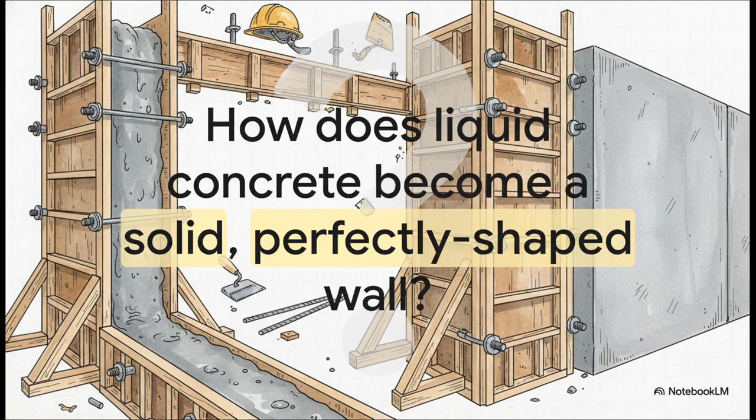So, have you ever just stopped and looked at a perfectly smooth concrete wall and thought, how? How does a wet, soupy, heavy liquid get held in place so perfectly before it turns to solid rock? Well, that's the exact mystery we're solving today. The answer is something called formwork, and really, it's just a temporary mold. The source material gives us this brilliant, simple way to think about it.

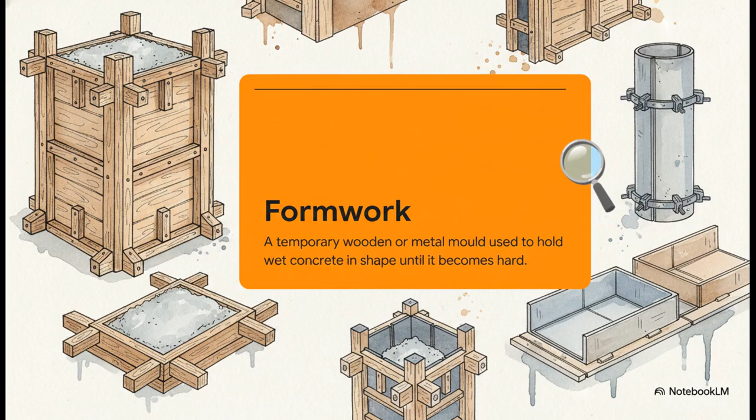Just picture a container or a box. That box is what gives the concrete its final shape, holding it all together until it's strong enough to stand up all on its own. Simple, right? But so important. Okay, so now that we know what it is, let's dig into why it matters so much. This is really the secret sauce, the hidden framework, pun absolutely intended, behind every single strong concrete structure you've ever seen.

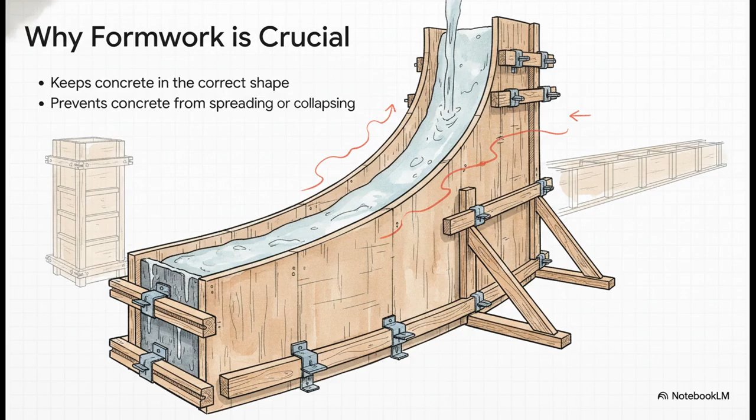You know, the job of formwork sounds simple, but it is absolutely vital. Its main role, of course, is to give the concrete its shape. Without it, you just have a giant gray puddle. But it also has to be crazy strong to hold back all that weight and pressure, keeping it from just bulging out or collapsing. This is the skeleton for everything from a simple garden wall to massive structural beams in a skyscraper. And this is why you have to get it right.

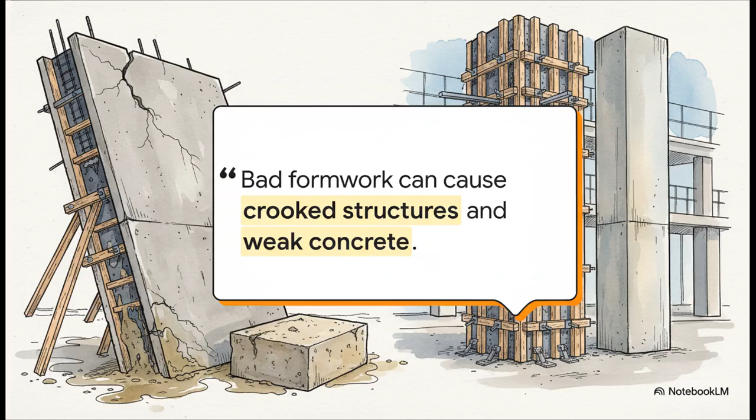The stakes are incredibly high. You see this quote here? Bad formwork doesn't just look sloppy. It actually creates structural weaknesses. A crooked wall isn't just ugly. It's a potential point of failure. So the big takeaway is this. The quality of the formwork directly, and I mean directly, determines the quality and safety of the final building.

All right, so you're convinced. You know this has to be done right. So what do you actually need to get started? Let's gear up and take a look at the toolkit for a successful build. First up, materials. It's a pretty straightforward list, really. You need your timber, your wood boards to build the mold. You need nails and screws to hold it all together. And then there's oil. Now that might seem like a small detail, but trust me, we'll come back to why that little can of oil is a total game changer.

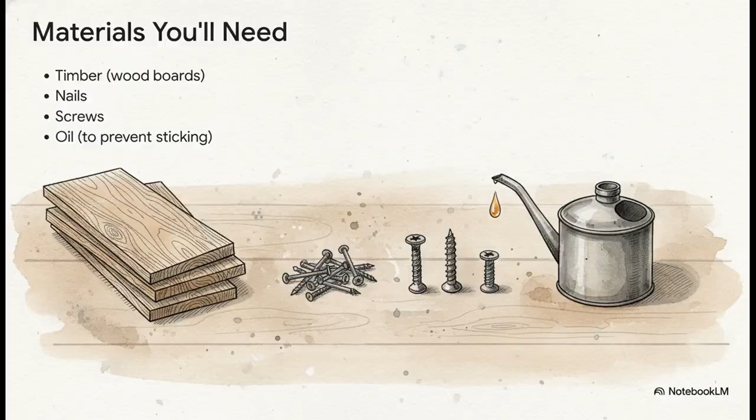Okay, we've got our materials, we've got our tools. Now it is time for the main event, actually building this thing. Let's walk through this step by step so you can make sure you get a perfect, strong, and safe pour every single time. But wait, before we even think about hammering a nail, we've got to talk about the golden rules. Think of this as your pre-flight check.

Use strong wood, no shortcuts with weak stuff. Make sure it's firm and stable, because it's about to fight a battle against the pressure of that concrete. Check that all your joints are tight, no gaps. You don't want concrete bleeding out. And finally, apply that oil.

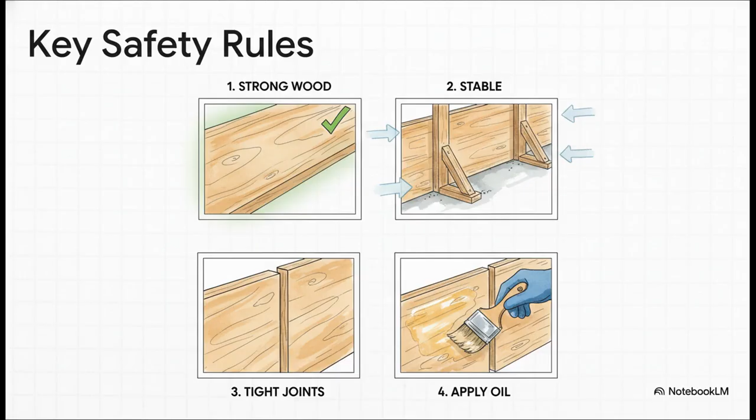This is what keeps the concrete from sticking to the wood, so it comes off clean. And here's the roadmap. It lays out the whole process perfectly. You measure, cut, assemble, and fix it together. But I want you to pay extra attention to steps 5 and 6.

Step 5, checking the alignment, is non-negotiable. That's what stops you from building a crooked wall. And step 6, adding braces for support, is what gives your formwork the muscle it needs to hold back all that concrete. Get those right, oil it up, and you are ready for the pour.

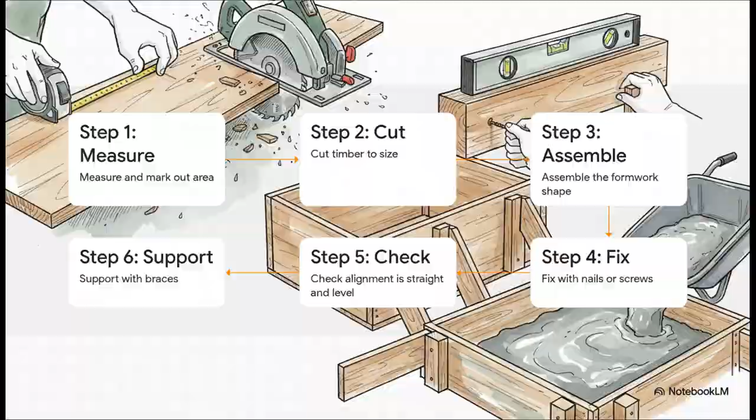So the concrete is poured, it's starting to harden. You'd think the job's over, right? Not quite. Taking the formwork down, dismantling it, is just as critical as building it. This is the big reveal, and you definitely want to do it right. Okay, let's look at the takedown.

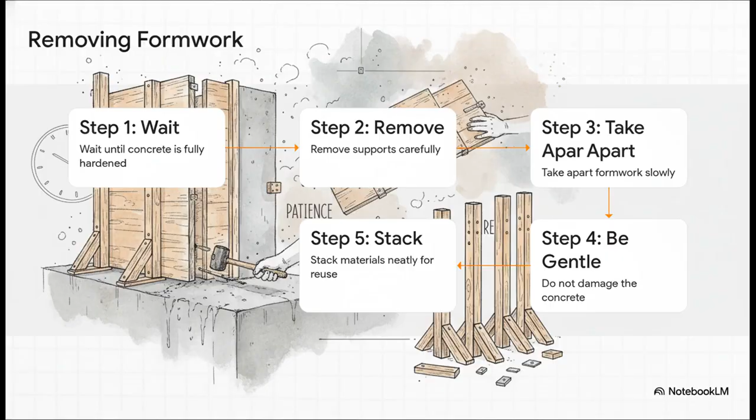I told you we'd come back to this. Seriously, if you remember only one thing from this whole explainer, let it be this. Do not rush this step. Taking the formwork off too early is one of the most common and most catastrophic mistakes you can make. That concrete needs time to get to its full strength. Just be patient. It's worth it.

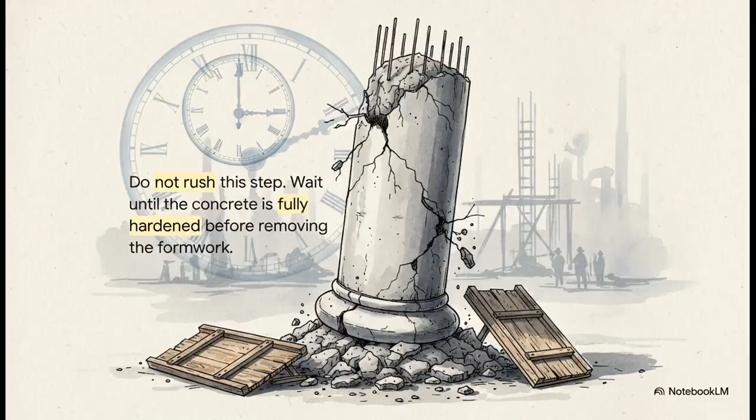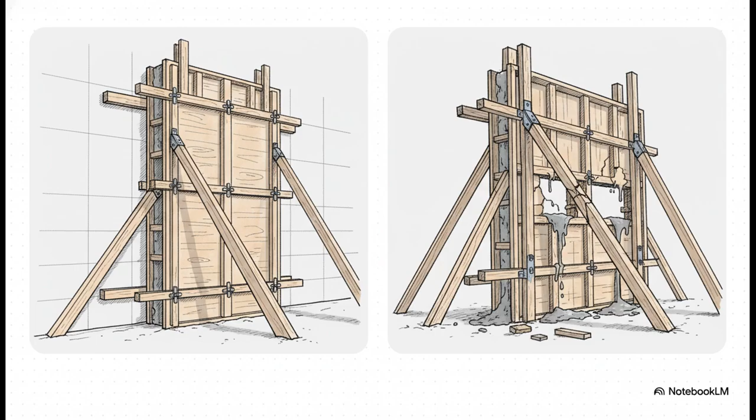On the right, you see what happens when you cut corners. Weak supports, leaky gaps, and, yep, taking it down too early. Every single mistake on the right is just a failure to meet one of the standards on the left.

And this is the payoff. This is your reward for doing the job right. It's not just about avoiding a collapse. It's about creating something excellent. Good formwork is the only path to a finished product you can actually be proud of, one that's smooth, strong, and built to last for years to come.

All right, let's bring it all home. We've gone from the basic idea to building it to taking it down. So what are the absolute key lessons you need to have locked in your brain? Here is a super simple way to remember the whole process. Just think UMTSD. First, understand its uses, shaping and supporting.

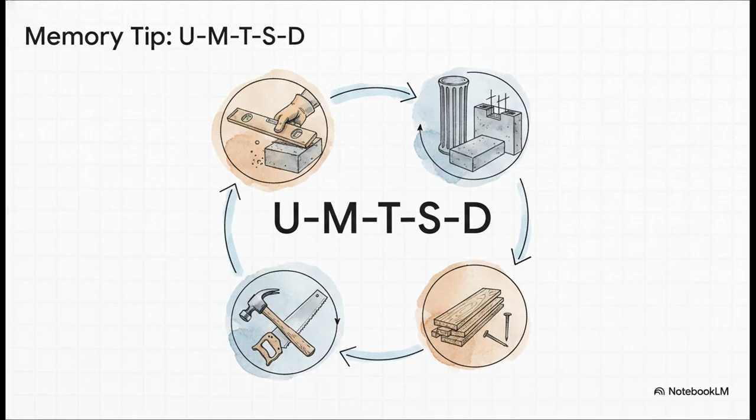Next, get your materials and your tools, from the wood to the spirit level. Then you build to the highest standards, make it strong, stable, and sealed. And finally, you follow the rules for dismantling. Be safe and be patient. That little acronym covers basically everything we've talked about today.

And with that, I'm going to leave you with a final thought. You now know the secret behind the shape of nearly every building, bridge, and sidewalk around you. So the next time you're out for a walk, what are you going to see differently? Will you maybe notice the faint lines on a concrete wall left behind by the timber boards? Or will you just appreciate the perfect, sharp edge of a column? The hidden structure is now visible to you.